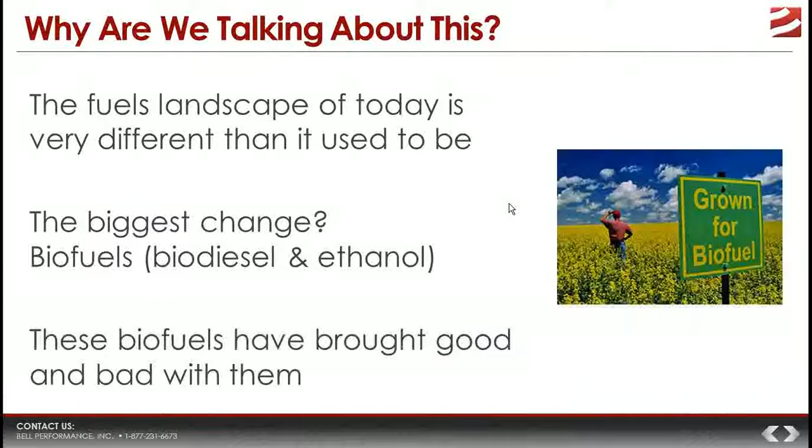The aspects we're going to talk about: how and why biofuels have become so commonplace in gasoline and diesel, the effects both good and bad — because nothing is 100% good or 100% bad — the effects these have had on the fuels, some of the problems and issues that might be manifesting themselves where you're at, and some best practice recommendations to solve those problems.

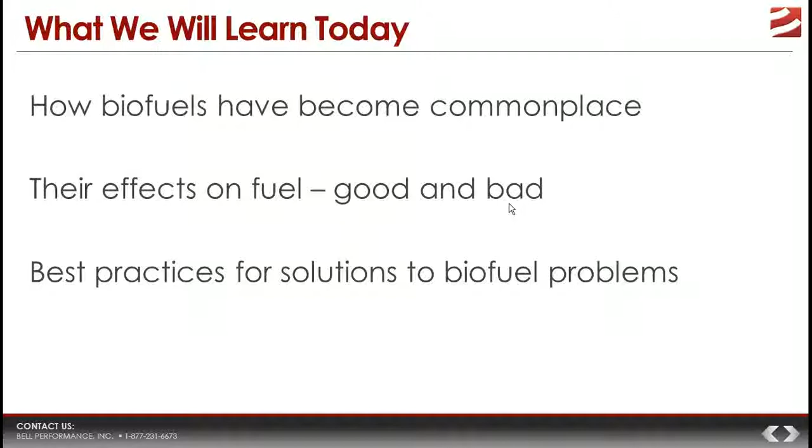First thing: we've already said today's fuels are not the same. Fuels are a lot different than they were in yesteryear.

The two big major reasons for those changes are increased demand on both a nationwide and worldwide basis, and government regulation — that's a big one, we'll talk about it in more detail later. But those two forces essentially have come together and given us fuels that don't have as long a storage life, are more susceptible to microbial contamination, and don't burn as cleanly as they used to. In many ways, the fuels of today are of lower quality than they were in the past.

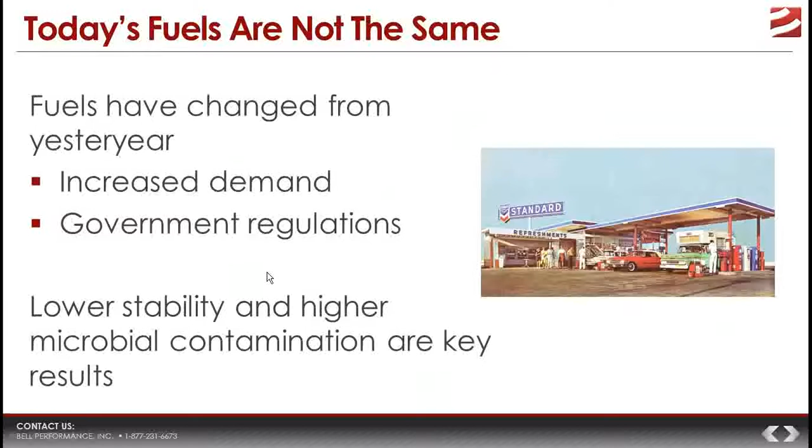So we're going to talk about the major reasons why that is with respect to these biofuels. When we talk about biofuels, we're talking about biodiesel and ethanol, and the biggest drivers for those ending up in our fuels are a couple of legislative pieces: the Clean Air Act and the Renewable Fuel Standard.

These together form essentially a legislative mandate to force change in fuel properties to help clean up the environment. The Clean Air Act mandated the removal of sulfur from diesel fuel, which was the major contributor to acid rain. It also required a change in gasoline composition to force the creation of oxygenated gasolines, which, when they burn, produce lower emissions and help urban air pollution.

The Renewable Fuels Standard came around in 2005, and this really defined what was expected in a more concrete way. Basically, one of the relevant aspects says that by a certain year, the United States is going to use X billions of gallons of fuel derived from renewable energy sources, which for our purposes means ethanol and biodiesel.

So the reason we have them is because of these two legislative mandates. The nuance to remember is, whenever the average person considers ethanol in gasoline, they always blame the EPA. The EPA certainly acts as an enforcement or implementation arm, but the EPA is not to blame for having ethanol in our gasoline — Congress is to blame. Congress makes the mandate, and the EPA has to follow Congress's directions. So the EPA gets a bad rap a lot of times, but in this case it's not 100% their fault.

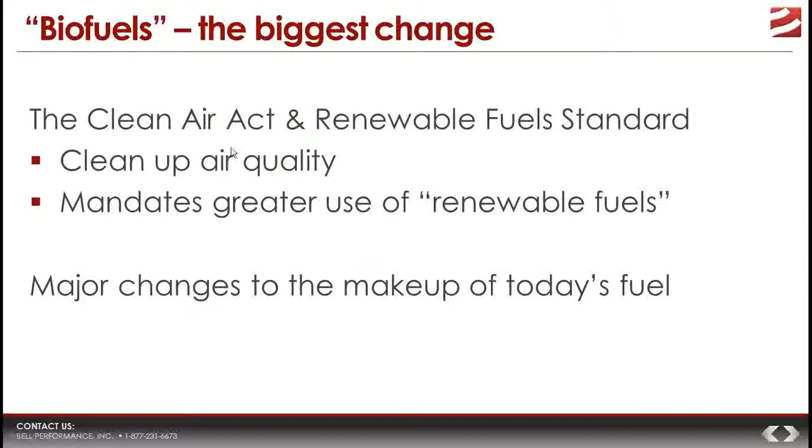So let's talk a little bit about these two things. Let's talk about the diesel side first.

Talking about biodiesel in today's diesel fuels. The first thing we have to remember is that most of the on-road diesel fuel you see today will have some kind of biodiesel content in it. Biodiesel itself is what we call a diesel-like fuel. It's essentially fat and oil that have been chemically converted into something that burns closely enough to diesel fuel that you can put it in a diesel engine and run that engine without too many problems.

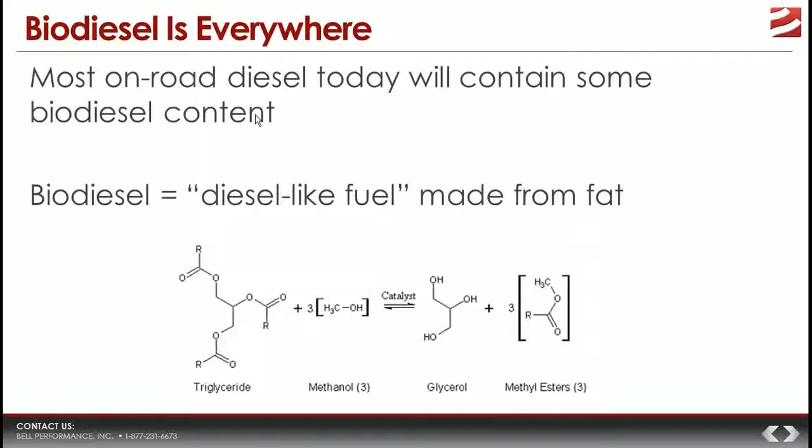What we started off saying is that most of the diesel you'll find today already has low levels of biodiesel mixed into it. The rules today basically say you can put up to 5% biodiesel content into diesel fuel and not disclose it in any way. So you could have 2, 3, or 4% biodiesel content in the diesel you're buying at the pump, and it doesn't have to be changed with respect to its labeling. It can just say diesel fuel. The rationale is that number 2 diesel fuel is defined by its properties, and if you put biodiesel into it at 2 or 3%, it doesn't change those properties, so you don't have to label it. So you're probably already using biodiesel to some extent without even knowing it.

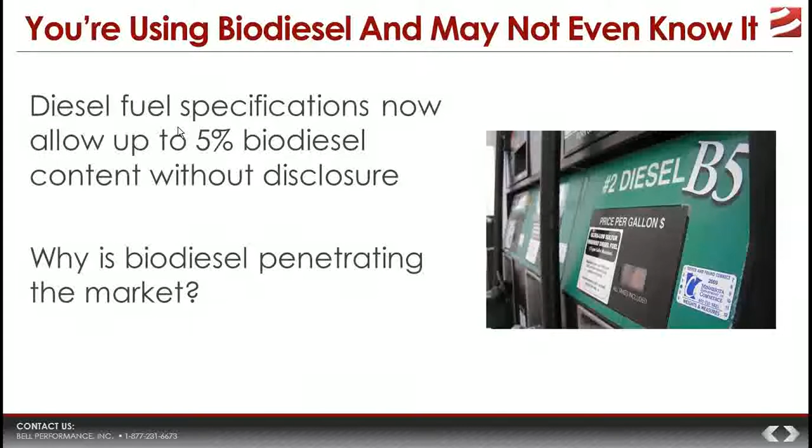Now, why has it penetrated the market the way it has? Well, because it's made from fat and oil, it's considered a renewable fuel. So it has a renewable fuel status, and that plays pretty well politically. Politicians are always looking for ways to tell consumers, to tell their constituents, hey, I'm green, I'm environmentally friendly. So it tends to be a positive political play to be in support of these renewable fuels.

It also satisfies the RFS, the Renewable Fuel Standard. Congress dictates that a certain amount of renewable fuels has to be used each year. Putting 2, 3, 4%, or more biodiesel helps meet that mandate. And when I say other political mandates, it's not just Congress. We're also talking about mid and low-level politicians. The governor of Florida, Rick Scott, says Florida's going to be more green, and we're going to direct our state agencies to buy more biofuels. When he says that, the county managers and other agencies all the way down the line fall into line to try to be compliant with Governor Rick Scott's mandate. So it's not just Congress saying it, it's all these other politicians basically driving this mandate for more renewable fuels.

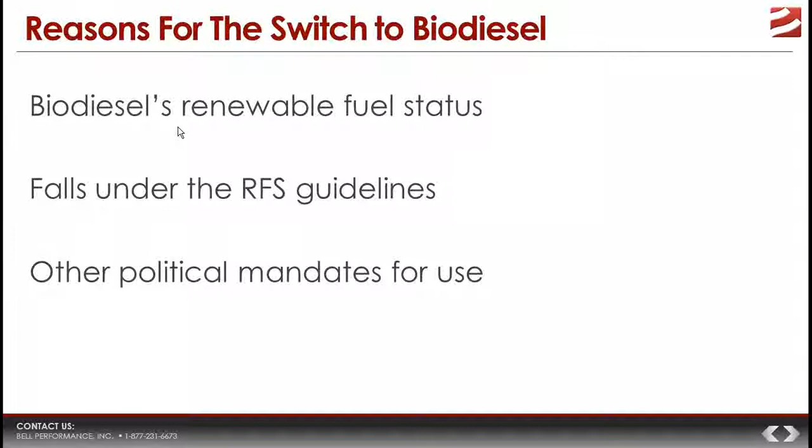So let's talk about the good things about biodiesel. Apart from the economics issue, biodiesel from a fuel property standpoint is a pretty good fuel. It burns pretty well like conventional diesel fuel, which means you can put it in up to 20% concentration, which is called B20. You can mix it into diesel fuel up to 20% and have virtually no meaningful difference operationally speaking.

And because of that, it won't affect your diesel engine warranties, for example. That was one of the big concerns when it was first introduced, whether it would cause warranties to be voided. Well, if you have B20 that is properly within spec, it's not legal for an engine warranty company to say you used B20, so you're out of luck with your warranty claim.

Biodiesel produces environmentally friendly levels of emissions. In other words, it produces less emissions, which is one of the whole reasons why they want to use it. It replaces petroleum, which is partly a political issue, but if you're mixing 20% bio or 5% biodiesel, that means you're using 20% or 5% less oil, and that's always a good play from a political standpoint.

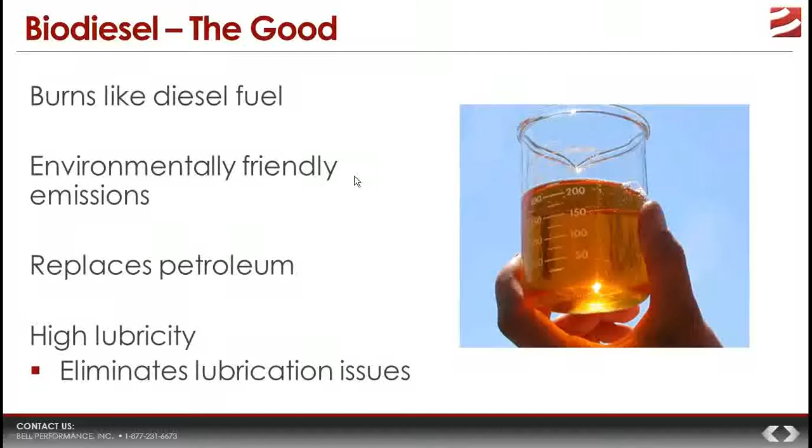Now let's talk about some of the downsides. First, we're mainly talking about microbes, water, stability, and cold weather performance. Biodiesel is an excellent food for microbes - they love it. So biodiesel blends promote a greater chance of microbial growth. They also increase the tendency for diesel fuel to absorb water, and since we just mentioned microbes, anytime you're talking about water, you always have to be concerned about microbes.

Biodiesel is more hygroscopic than diesel fuel normally is, so it increases water absorption. And then there's stability and cold flow performance. Up north, cold weather performance in terms of gelling is a big concern. Depending on what feedstock you make biodiesel from, some biodiesels gel and thicken at 40 or 50 degrees, or 30 degrees, which if you're up in Michigan or Ohio, or a farmer in Iowa, that's a big problem. And biodiesel itself inherently has poorer stability tendencies than regular diesel fuel has. So that's the good and bad about biodiesel.

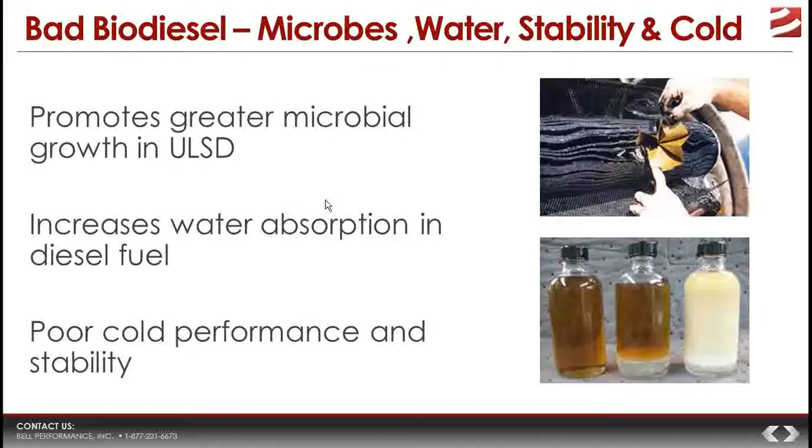Let's talk about ethanol and gasoline. That's the other major one. That's the one that probably gets more play in the media, more play with the average consumer.

Now, contrary to popular conception, ethanol in gasoline is not a 21st century invention. Ethanol has actually been used in gasoline engines pretty much since the very beginning. The Model T, Henry Ford, 1908, was designed to run on either ethanol or gasoline. The amount of ethanol the country has used through the 20th century has gone up and down depending on whether gas or oil was more or less expensive. But it's been around for a lot longer than people realize.

So why are we using so much of it now? Well, to understand that, we got to go back to those government regulations. In 1992, they make an amendment to the Clean Air Act that directs them to reduce urban air pollution from gas-powered cars. The way they're going to do that is by requiring reformulated gasoline, sometimes called boutique gasolines, mandating that they mix in fuel oxygenates. When you burn that new gasoline, it burns cleaner from an emissions standpoint. So far, so good. It is certainly an admirable, noble goal.

So what is an oxygenate? From a chemistry standpoint, there are lots of different things you can put into gasoline to function as oxygenates. All they need to have is a high oxygen content. So you increase the oxygen content of the gasoline, you burn it, you produce less carbon monoxide and other harmful urban air pollutants, and over time, hopefully, you help remediate some of this air pollution problem.

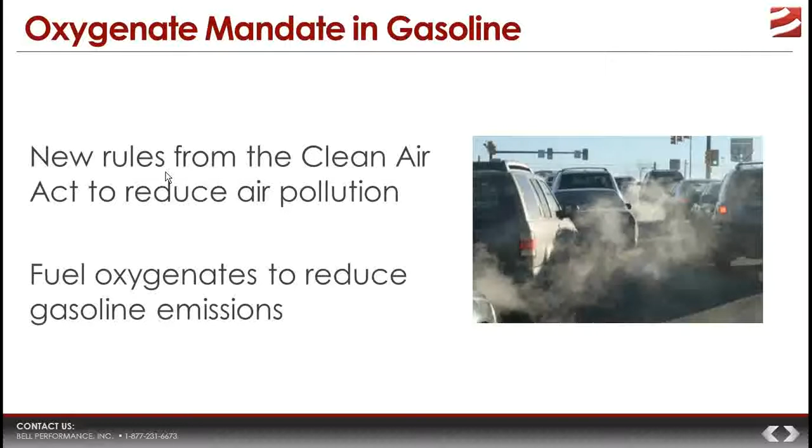In 1992, Congress says you've got to start doing it. They ask, okay, what can we put in it? The first oxygenate they considered was MTBE, which is an acronym for methyl tert butyl ether. MTBE was already being used in low levels in the nation's gas supply as an anti-knock agent, an octane booster, mainly because of when they started phasing out the lead. They started taking the lead out around 1979, late 70s, and began blending MTBE in to try and replace some of that octane.

So now they say, well, we can also use it as an oxygenate. They start blending it in, typically around 10% volume, and at its peak in 1999, they're using 8.5 million gallons every single day in the nation's fuel supply. So far so good, everything seems to be great, except they start getting reports that MTBE is contaminating drinking water.

Now, they're not so concerned that MTBE causes cancer or birth defects or something like that. The biggest concern is that just a little bit of it makes drinking water taste really, really bad. And when we're talking a little bit, we're talking parts per billion. There was an interesting stat I read: if you took all the drinking water needed to supply the entire 7 billion population of the world for their entire lives, 80 years, you would need less than 8,000 gallons of MTBE to make that entire water amount undrinkable.

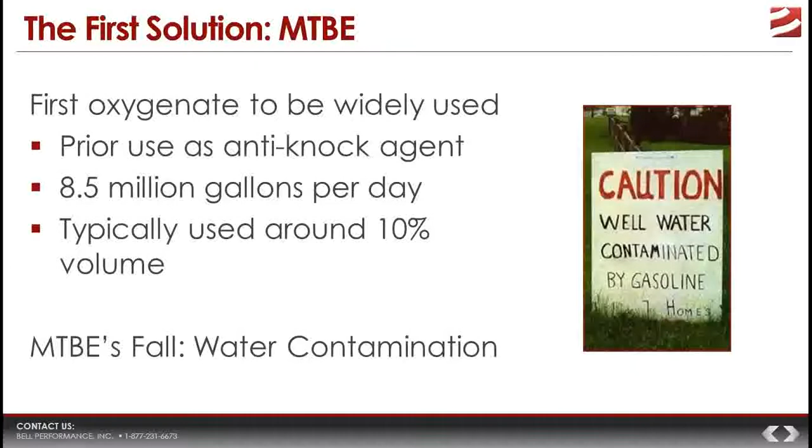States start banning it in their on-road fuel around 2005, but they still have to satisfy the congressional mandate. So what are they going to do? Well, they have to have a replacement oxygenate. And any replacement that they choose has to be inexpensive to make, you have to be able to produce it easily in large amounts, it has to be safe to handle because you're going to produce it in one place and distribute it out to all corners of the nation, and it has to be easy to transport.

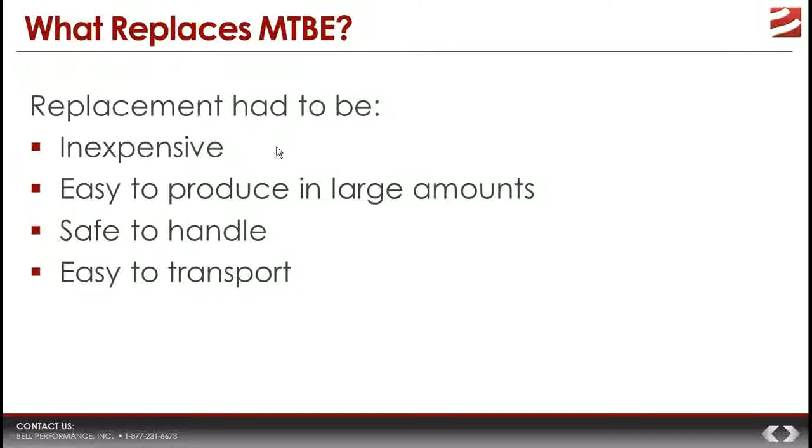So the thing that they settled on was ethyl alcohol, ethanol. And ethanol meets, from a logistics standpoint, it meets all of those requirements. It's easy to produce, it's safe to handle, it's relatively inexpensive to produce, all things considered. So ethanol becomes the replacement.

And again, we said nothing is 100% good and nothing is 100% bad. Well, same thing applies to ethanol. Ethanol has some good points.

It's got a high octane content, which means that like MTBE, they're able to not only use it as an oxygenate, but also use it to help make up some of the octane requirement of the finished gasoline. So for the refiners, that's good because if they're trying to make an 89 octane gasoline, maybe they start with an 86 base stock and add their 10% ethanol, and depending on how the math works out, maybe that gives them their 3 extra points. And so they've killed 2 birds with 1 stone.

Second good thing, of course, is that it is easily made from corn and other plants. It's been made by people for millennia, so obviously people know how to make it.

What's good about ethanol? Let's talk about the good and the bad. Similar to biodiesel, number one, it's an oxygenate, reduces emissions from gasoline, reduces carbon monoxide and other ground level ozone production, the kinds of emissions that are terrible for urban air quality. So it reduces emissions, and like biodiesel, it volumetrically reduces the amount of oil we're using. If you put 10% ethanol in gasoline, that's 10% less petroleum you're using. Those are the two main good things about it.

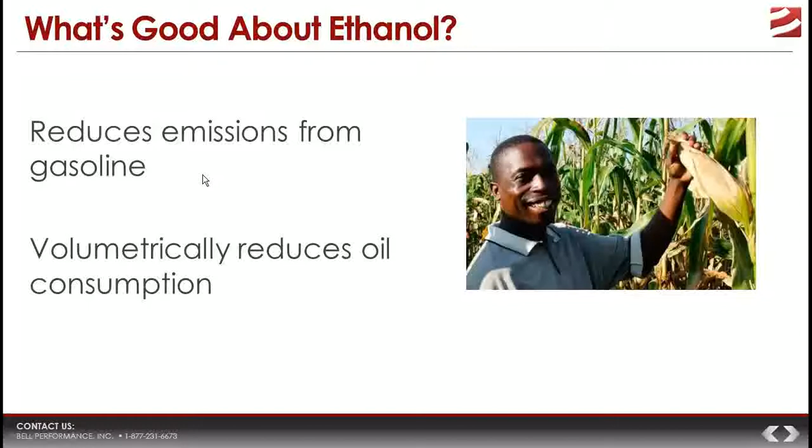But people forget about the good things because they want to concentrate on the bad things. And there's plenty of bad things to talk about when you're talking about ethanol. Let's start from a consumer standpoint, what I term a macro consumer standpoint.

Ethanol has made food more expensive. It makes food prices go up. Depending on the source, right now anywhere in the United States, 25 to 40% of the nation's corn supply is not being used to make food anymore. It's being diverted to make fuel. So by simple supply and demand, anything that uses corn to produce food - meat, beef and dairy and pork, eggs for chickens, anything with corn syrup and corn content - the prices to make those are going up. That is largely attributed to the ethanol fuel problem.

Second problem, lower energy content. And anytime you have lower energy content, everything else being equal, you get less mileage. That's the thing that resonates most directly with consumers, but it's also a business concern. We'll talk a little about the issues of scaling, the cost scaling here. For consumers, the amount of mileage they're losing using E10 gasoline is probably about 3 to 4%. Ethanol itself, compared gallon to gallon, has 30% less energy. But you're not burning 100% ethanol, you're burning 10%. So a 3 to 4% reduction in fuel economy probably costs them a couple hundred dollars a year.

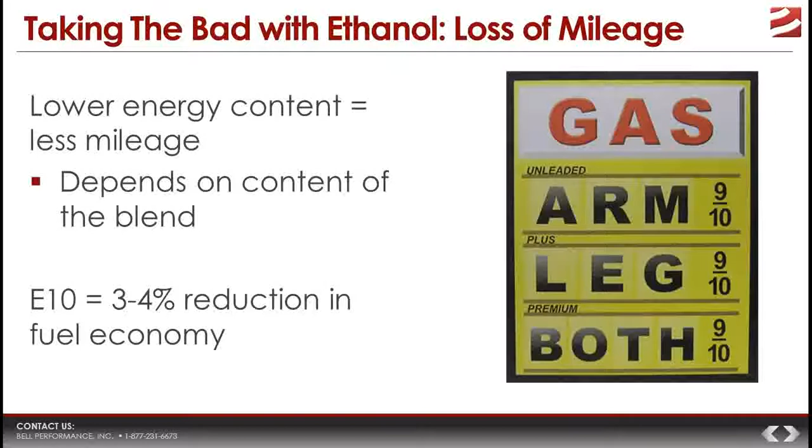Material damage. This is where we start getting into issues if you use ethanol in small equipment - lawnmowers, weed whackers. When ethanol stays in contact with polymer parts, the rubber and plastic, over time it will dissolve those polymers, soften them, and cause damage.

When ethanol started really spiking around 2007, 2008, one thing you saw was a sharp uptick in business for small engine repair shops, because people were coming in with busted fuel lines, seals being eaten, and corrosion in their small engine carburetors. It was pretty apparent - if you Google it, you'll see references on local newscasts about repair shops having to deal with this problem.

From a consumer standpoint, nobody wants to have to spend $100 to get another weed whacker. But from a business standpoint, again, it's an issue of scale. If you have a municipality with 100 pieces of equipment to maintain municipal grounds or whatever, they're not looking at $100 or $200, they're looking at thousands of dollars because of this ethanol solvency problem.

Now, we mentioned small engines. Small engines and ethanol do not play well. Ethanol causes corrosion to the carburetors, as you can see, and for two-stroke engines where you have fuel oil lubrication, ethanol tends to attract water, and that water attraction will interfere with lubrication and can cause catastrophic engine damage and destroy that small engine.

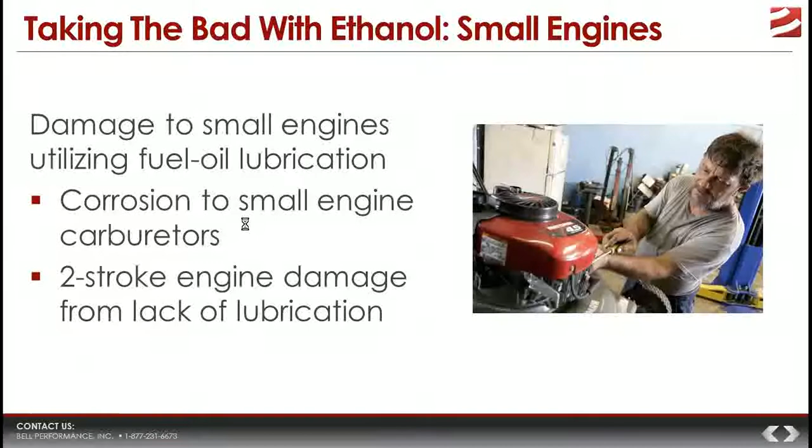Now, that may not seem like a big deal - maybe that's being overplayed, you might think. But it's a serious enough problem that small engine manufacturers are specifically warning people not to use more than 10% ethanol. This is Briggs & Stratton, an official statement from Briggs & Stratton.

There are other official statements you can find. If you Google it, you can find the Echo had one as well. It's basically: do not use unapproved fuels such as E15 ethanol because it'll damage the engine and void your warranty. If you've been in a place like Home Depot, you might have seen they actually have a partnership with small engine retailers called the Look Before You Pump campaign. They have a logo, they put up signs in the small engine department saying, hey, if you buy this lawnmower, don't put E15 in it because it will destroy the engine. So it's a serious enough problem that the engine manufacturers, who don't usually do this kind of thing, are trying to warn consumers about the problem.

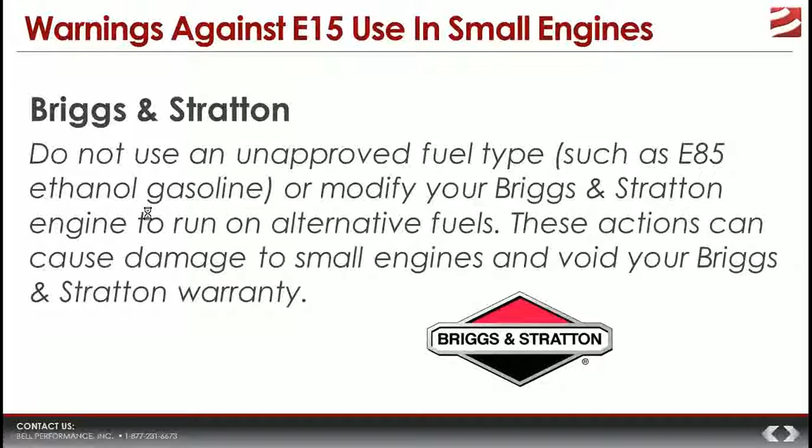A few minutes ago we were talking about the congressional debate over ethanol, and this is one of the reasons why they have a problem, because there's less gasoline to mix ethanol into. They say, well, if we still want to use 14 billion gallons of ethanol, let's just change from 10% to 15%. Well, you can't do that, because people are going to take that E15, which is now all they're going to be able to find at the pump, fill their gas cans with it, and put it in their lawnmower. Now they're going to have issues — they're going to be doing exactly what Briggs & Stratton and Echo and others are warning them not to. That's why there's a problem with the ethanol debate that Congress has to figure out an answer to.

All right, now let's transition into more business issues. We talked about the mileage, the small equipment damage, and food prices — those are things that consumers are concerned about. But businesses are the ones that really have a lot at stake, because they're not worried about losing $100. They're worried about the 5 or 6 figure costs, capital costs and investments that they've sunk into their fuel management.

So with businesses, the problems with ethanol being so widespread in the fuel — first, poor storage stability. It used to be that you could get 1 to 2 years out of regular gasoline back in the day. Now, if you have gasoline with 10% ethanol mixed into it, your storage life can be as little as a month. That's a big difference between a month and 2 years.

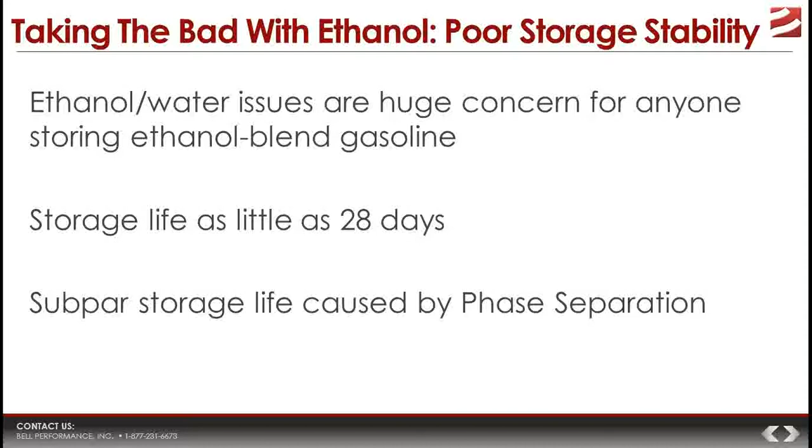Why is that? Well, it's mainly caused by a phenomenon called phase separation. To understand it, we've already mentioned that ethanol, alcohols in general, are hygroscopic, just like biodiesel — they attract water. So if you have a 10% ethanol blend, it will attract water and absorb it out of the environment, out of the air around it. Now, all gasoline has a limit to the amount of water it can absorb. If it crosses that limit, the ethanol that used to be seamlessly blended into it will start to separate out. It'll start to drop out, carrying water with it, and you'll get a layer of ethanol-rich water at the bottom of the storage tank, with the gasoline sitting on top. That is phase-separated gasoline.

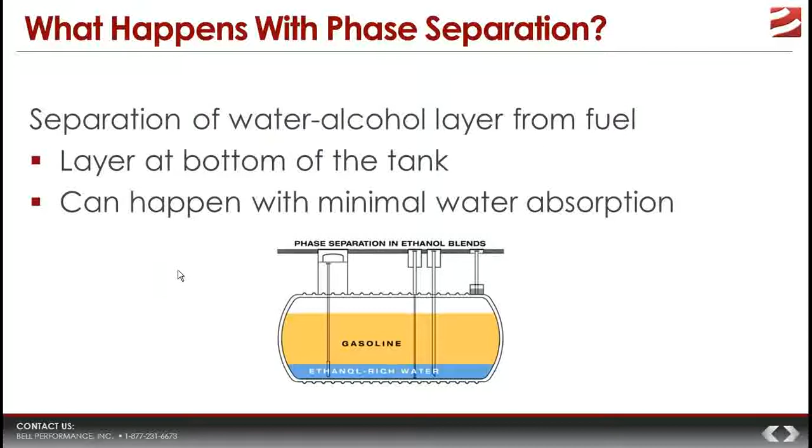Now, the question that comes to mind is, so what? Why is this a problem? Well, it's a problem because, in general, phase separation destroys fuel quality. There's a couple of problems here. First, if an engine happens to get some of that ethanol water — let's say it's drawn up into the fuel intake line while it's burning gasoline — all of a sudden it gets a slug of this alcohol and water. The alcohol and water burns at a higher temperature than the gasoline, and you can get pretty serious, catastrophic valve or engine damage if that happens. So that's kind of a catastrophic scenario.

The more likely scenario is the problem of stripping the octane out of the gasoline. Remember, we said refiners use that 10% ethanol mandate to help make up part of that octane value. If some of that ethanol drops out of the gasoline, the gasoline that's left is going to have lost actually more octane than the ethanol contributed to. What I mean is, if it was an 86 base gasoline, meaning 3 octane points were contributed by the ethanol, and let's say theoretically all of that ethanol drops out, the octane value left behind in the gasoline isn't just going to be 86.

It's probably going to be 85 or 84 octane, because the ethanol will actually strip out more octane than it contributed. So what you're left with many times is a layer of gasoline that is extremely poor quality, and may not even burn properly.

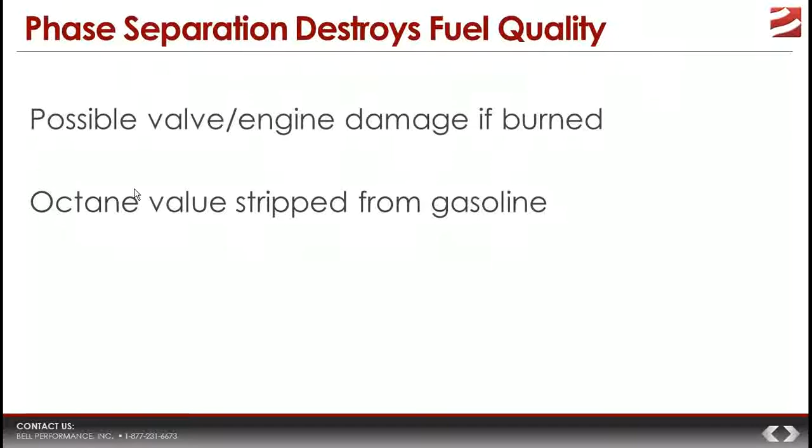That's a huge problem when you're talking about any critical use engine or mission critical area that has gasoline which has to power something that needs to work on a moment's notice. If you're not confident the gasoline will do what it needs to when you need it to, you've got some real problems. So phase separation is a huge reason why gasoline doesn't have anywhere near the storage life it used to have.

All right, third one, tank corrosion. Ethanol corrodes and damages storage tanks over time because of two things. First, it attracts water, and anytime you have water contacting metallic parts, whether in a storage tank or outside, it contributes to corrosion damage.

Second, ethanol and biofuels are excellent fuels for microbes. There are certain kinds of microbes that love to consume ethanol, and when they do, they produce acetic acid, which corrodes tank parts both below the fuel line and above it. That's where you see acid vapor corrosion.

The acetic acid produced by these microbes will vaporize, go up into the air above the fuel line, and start to corrode the tank above the fuel line. So when it comes to tank storage and maintenance recommendations, a lot of tank manufacturers say to check the upper parts of the tank. If you see corrosive indicators there, it's a strong sign there's even worse damage down below from acid vapor corrosion.

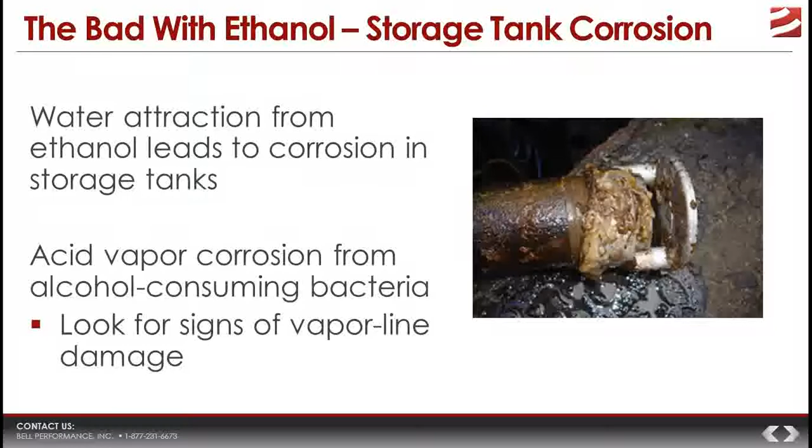Anytime you're talking about tank corrosion, you're talking about serious impact on your budget, because replacing corroded parts and damaged tanks is a really expensive proposition. That's where it really starts getting expensive for businesses.

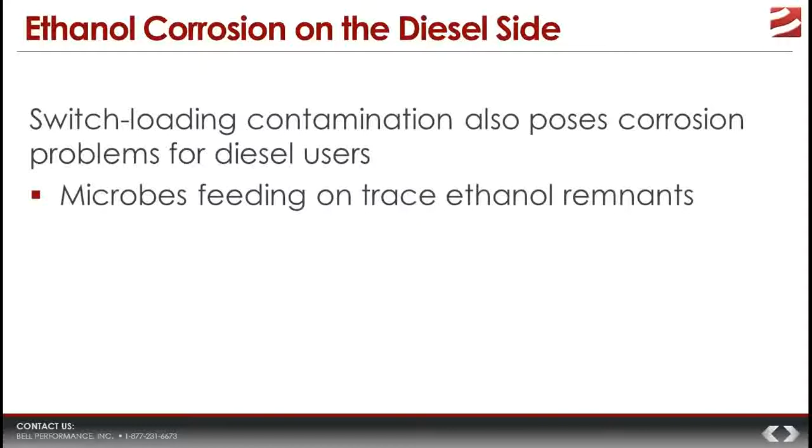Diesel users are not immune to this ethanol corrosion problem. That's because a lot of the same trucks that transport diesel fuel also transport ethanol gasoline, and many times they aren't cleaned out as well as they could be. So there are diesel users out there getting trace amounts of ethanol gasoline in their diesel. These ethanol-consuming bacteria find those trace amounts and feed on them, producing acids. There are very real and serious instances of corrosion damage in diesel tanks because of trace ethanol switch-loading contamination, so diesel users are not immune to this.

All right, so those are the main issues with biodiesel and with ethanol. Now we come down to the nitty-gritty. Some of those may resonate with you — you may have seen examples, or know someone in an industry where these problems cause real serious headaches. So people always want to know what's the best practice recommendation to solve the problems. We'll summarize some of these. Some of this we've already talked about, so we're just going to briefly touch on these points to set up context for the solution.

First one, ethanol damage to small engines — we just talked about that a couple minutes ago. The problem is it softens and damages rubber parts, causes corrosion in carburetors, and interferes with lubrication because of the characteristics of ethanol: it's an excellent solvent, and it's hygroscopic, meaning it attracts water.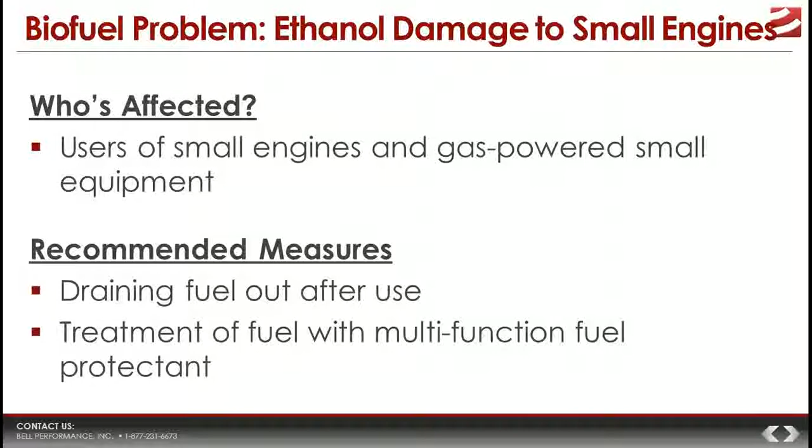That's one thing they recommend. The only other thing you can really do to combat this is treat the fuel with a multifunction fuel protectant. There are a lot of options out there. We're not going to go into specific names. Obviously, Bell Performance has manufactured solutions for this, and there are a lot of other things in the marketplace saying they do that as well. But our purpose isn't to tell you which one to buy specifically, it's to tell you the characteristics you want to look for, and that's three main things.

It has to have something that acts as a surface protectant, creating a boundary layer of protection on all the surfaces the fuel touches. That boundary acts as a shield, a protective layer, and helps slow the solvency damage phenomenon. It also needs detergency, because anytime you put ethanol in an engine, if it's dissolving any of the polymers, those polymers end up deposited in other areas of the engine, and that causes performance problems, if not total destruction of the engine. So you need something with a good detergent package to carry these things through to the combustion chamber and get them out where they can be burned.

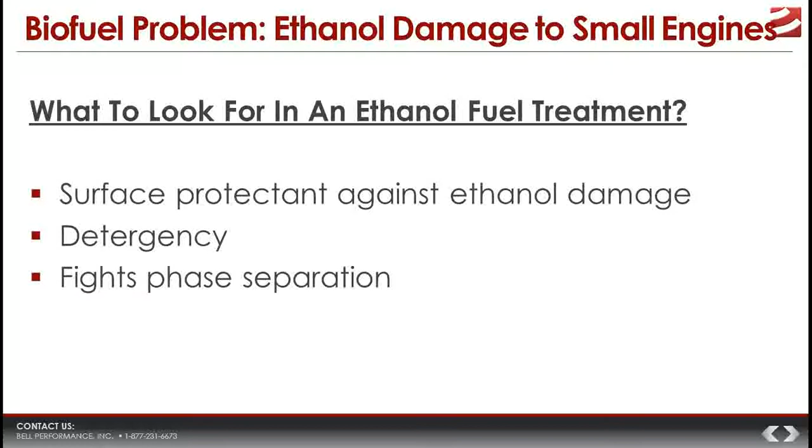And then the big one: it needs to fight phase separation. What we mean by that is it needs to improve the ethanol blend's ability to absorb water and resist the alcohol's urge to separate out. So those are the three main things you need to look for.

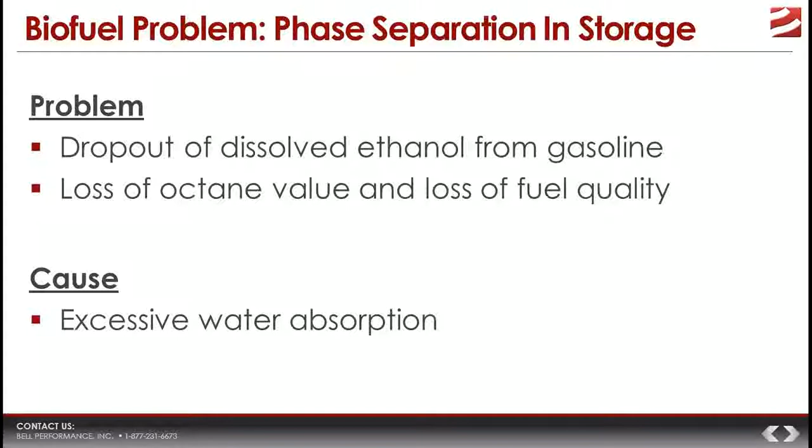A related problem is phase separation in storage. We talked about the fact that storage life is so much less than previously, and that's because of dropout of dissolved ethanol in gasoline when it has absorbed too much water. Because of that, the gasoline left behind has its fuel quality and combustion quality destroyed.

Anyone who stores gasoline, mostly on the B2B side, is going to be affected. Most consumers, the only skin they have in the game is maybe a couple-gallon gas canister they store gas in. But a municipality or a business with a fleet of gas-powered vehicles, maybe with a fuel storage tank, is talking about big investments in that fuel, which are put at risk by this phase separation phenomenon.

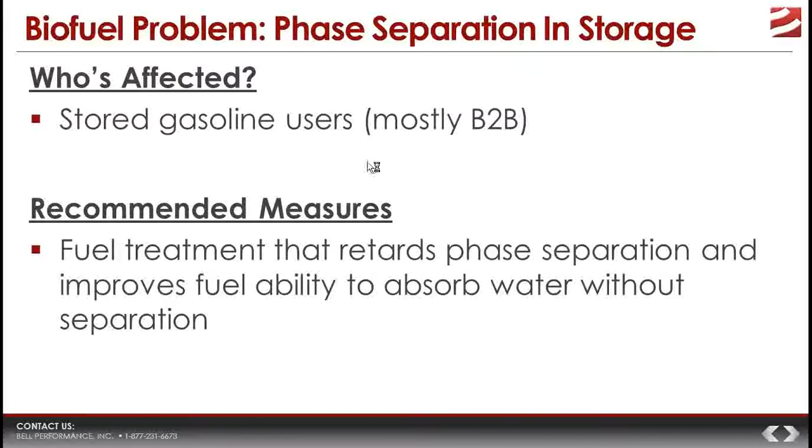We just said what the recommended measure would be. You can't keep the fuel from absorbing water, you just can't do that. So what you need to do is treat it with something that improves the fuel's ability to absorb water and resist this phase separation. That's really about the only thing you can do as a preventive measure to keep that from happening.

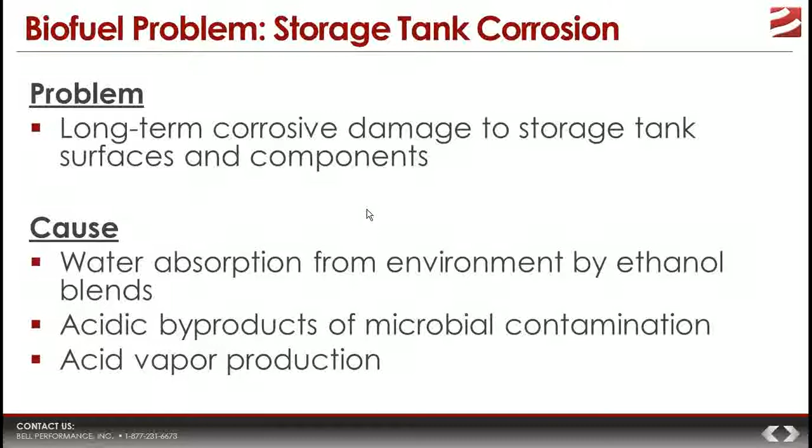Storage tank corrosion. Big problem, big expensive problem, because of two main things: water absorption from the environment, and acidic byproducts from microbes that live in the fuel and in the storage tank. Again, anyone who stores fuel has the potential to be affected by this.

So the recommended measures, three main ones. Keep the free water under control by checking the tank for water and removing the free water layer as often as possible. If you do it once a month, you're probably ahead of the game compared to everyone else, so at least once a month you need to do that. And then you need to apply a biocide treatment to the fuel, which is the only thing that will actually kill the microbes and keep them under control.

And then the third one: there are anti-corrosion tank treatments which act in the same way as these ethanol protectants do. They have fairly low treat rates. Bell Performance has one called Tank Treatment SCF, and there are other things you can use as well. So that's the third recommended measure you can use.

Ted has asked, with a lot of talk about gasoline, are these measures all the same for diesel fuel? Well, since you asked, we are actually getting ready to transition into the biggest problem that diesel fuel has, and then of course we can talk more about diesel fuel at the end as well. So we'll definitely see if we can answer that question for you, Ted. Fourth one.

Fuel and tank microbes - this is your diesel problem, Ted. The biggest problem, probably the single biggest problem that stored diesel fuel has, is microbial growth over time.

We could do a whole one or two hour webinar just on fuel microbes. In fact, we probably will at some point in the future. We're just going to touch on the main highlights here because we're coming down towards the end of this. But this is shaping up to be probably the biggest concern across the entire nation for diesel users - microbe problems, because the main focus of this is biofuels.

Biodiesel has combined with the requirement to make ultra-low sulfur diesel. Those two things have come together and caused an explosion in the instances of microbial growth in diesel fuel tanks.

And the microbes cause tank corrosion. They do other things like cause excessive filter plugging. They destroy fuel quality because of the byproducts of biological respiration. They cause huge problems.

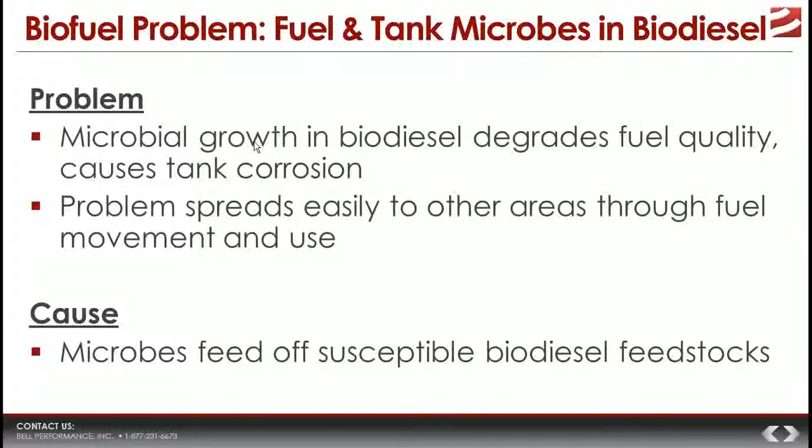And a unique nuance of microbe problems in fuel tanks is they spread easily anywhere that fuel goes. So if you have a microbe problem in a central storage tank and you don't do anything about it, or you don't even know it's there, and then you fuel equipment and vehicles from that tank, those microbes will spread into the vehicles, and suddenly you don't just have to clean out one tank, you have to clean out 100 tanks or 500 tanks or whatever. So microbes are a huge, huge problem for diesel users.

So again, anyone who stores fuel - both biodiesel and ethanol, and of course regular diesel - they're all affected by fuel and tank microbes. Recommended measures.

Again, we could talk for an hour about this, but we only have a few minutes. So the main measures are, you have to do two things: you have to reduce the conditions that microbes find amenable for growing, and then you have to do things to kill and get rid of the existing microbes.

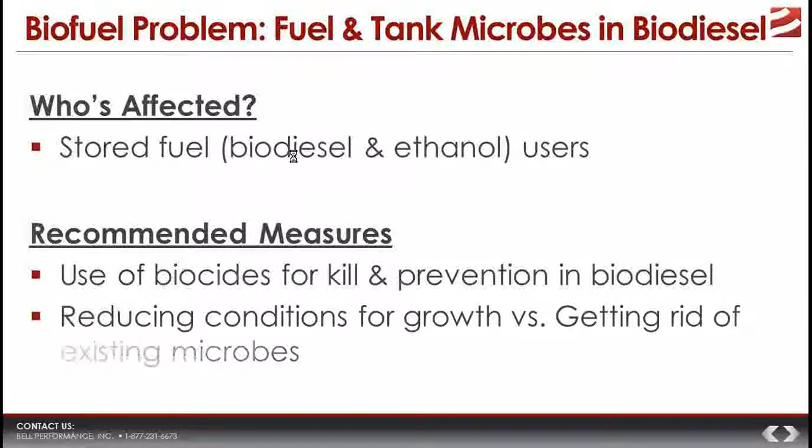So what we mean by reducing the conditions - sometimes those are rolled into what they call housekeeping measures. But for microbes, the main thing that falls under this is controlling free water buildup. Water is essential for microbes to grow. They need it. Virtually all tanks over time develop free water.

I mean, that's just the way it is out in the field. So when you have a free water layer at the bottom, you have a place that microbes can draw what they need from the water, draw what they need from the fuel. They've got everything they need to grow and thrive and build up and cause problems in that tank. So at least monthly, you need to check the water - you need to see if you can remove the free water.

That's the housekeeping measures, but that is not enough to be 100% sure you're never going to have a problem. And the reason for that is because of ultra-low sulfur diesel. See, way back in the day, back in the 80s and the early 90s and before that, the conventional wisdom was that if you kept the water under control, then you would not have microbe problems. And the reason why they thought that was because the fuel had a lot higher sulfur content back then.

Sulfur is a natural - we call it a natural biocide, but it's a preventive. Microbes do not like to be around sulfur. So those fuels were a lot more resistant to microbial growth.

Use of biocides - treating with a biocide at least once a quarter will kill the microbes in the tank and is your best bet for keeping them from coming back and causing a problem. Now this is extremely important, and Ted talked about the measures for diesel fuel. That's why we want to talk a little bit more about this briefly, because this is really, really important for anyone who has stored diesel.

There are a lot of things that call themselves biocides out there. If you're trying to figure out the best one to have, you need to have these characteristics. So we'll touch on them briefly.

Broad spectrum means it kills all of the kinds of microbes, bacteria, and fungus that are typically found. Fast acting, typically you want it to get a complete kill once it's properly mixed in within a couple of hours. Long lasting kill: 4 weeks is about the industry's top of the line that you're going to get out of a biocide. The thing to remember is biocides are not something that you put into the fuel once a year and come back to find still working. Biocides, when they kill microbes over time, they get used up.

And 4 weeks is about the best you're going to get. That's what our biocide, Bellicide, has. There are others that only last for 1 to 2 weeks. So you want something that will last as long as possible.

Dual phase effectiveness means since there's water and fuel in storage tanks, you need something that kills microbes in both areas. The most popular biocide, which is BioBor, actually gets deactivated in water, which makes it the least effective of the major biocides.

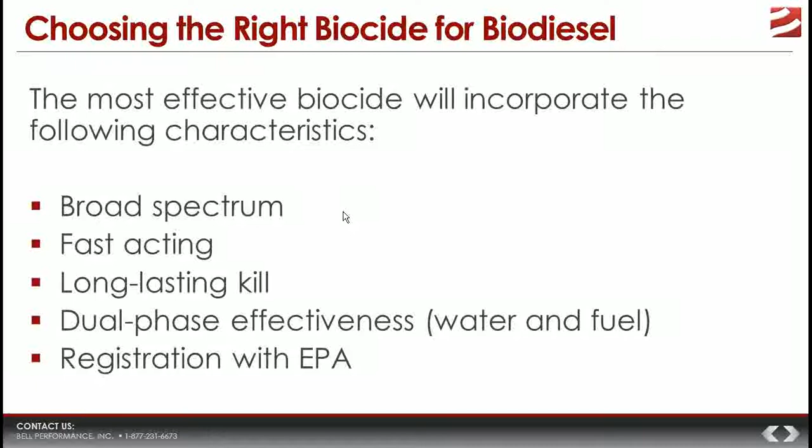Now, Lily asked, are biocides dangerous for humans? Absolutely they are. They are required to be registered with the EPA pesticide division. So when we say they're dangerous for humans, we mean about the same as if you had a weed killer or a pesticide of some kind. That means you don't want to ingest them, and you want to handle them properly. They'll have an MSDS that gives you the safety instructions. As long as you follow the safety instructions, you will be fine. But these are not things to be lax about handling, because they are designed to kill biological organisms.

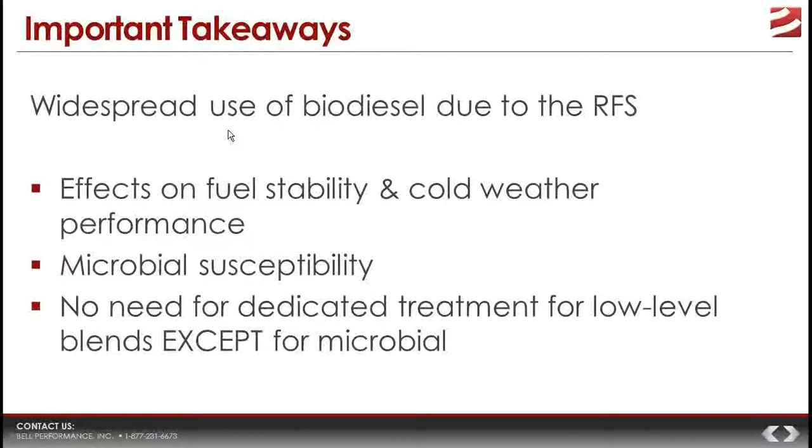That brings us really to the end of the webinar here. The important takeaways, since we're running up on time, you can see those if you access the recording. But basically, both biodiesel and ethanol have caused fuels to change in an adverse way. There are solutions for those, both housekeeping measures and fuel treatment methods. So that's basically the summation of what we've been talking about today. Ethanol blended gasoline causes small equipment damage, lowers your mileage, corrodes tanks, but there are solutions to all of these.